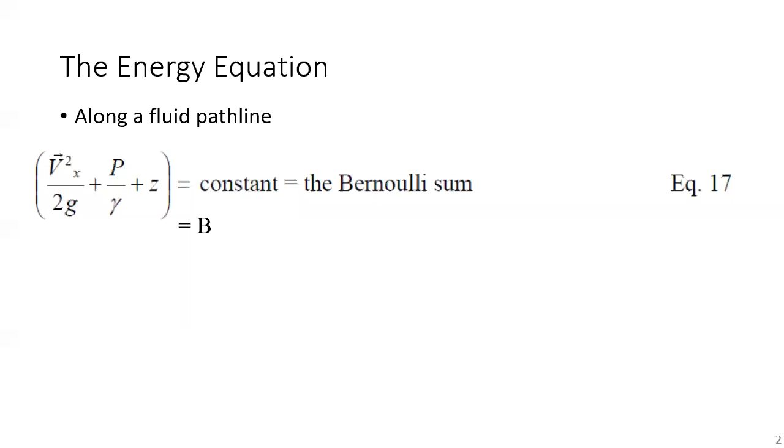And then we talked about the fact that those 3 terms sum to what we call the energy grade line. And so if you can draw the path line, and along the path line you can calculate the Bernoulli sum B anywhere, you can plot out B everywhere for that path line, and that's known as the energy grade line. Right now in systems without energy losses, no viscosity, and without mechanical energy, that energy grade line is just a horizontal line, or if you're talking about a system, it's a horizontal surface over the system.

In the future, that will not be true. Once we get energy losses, once we have mechanical energy, then the energy grade line can move around. And the hydraulic grade line is the sum of the potential energy, and that would be P over gamma plus Z. So for example, if we just looked at the center line of the pipe and called that our elevation, the distance between that center line of the pipe and the hydraulic grade line is just P over gamma. HGL is P over gamma plus Z.

And any one of those values could be zero. All three of those values could be zero. The energy grade line could be a positive number, could be a negative number, but it's a real number.

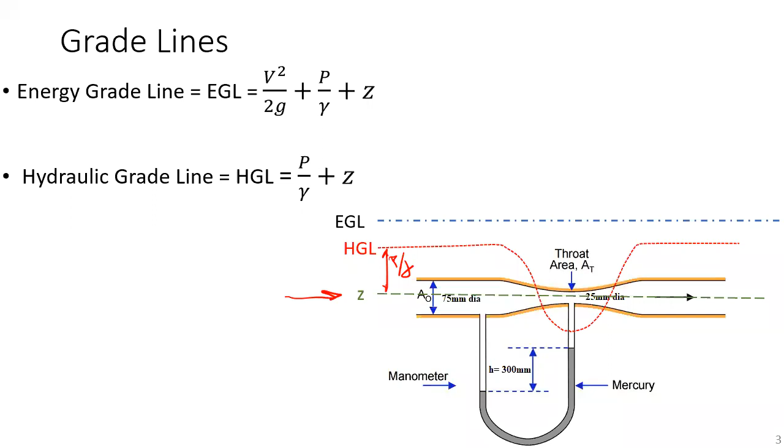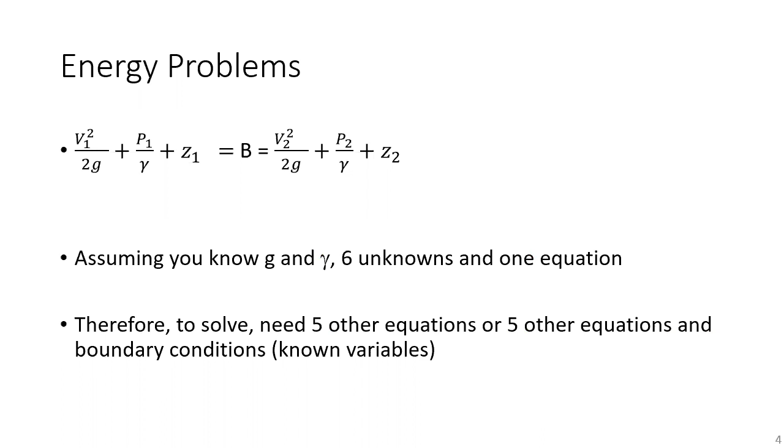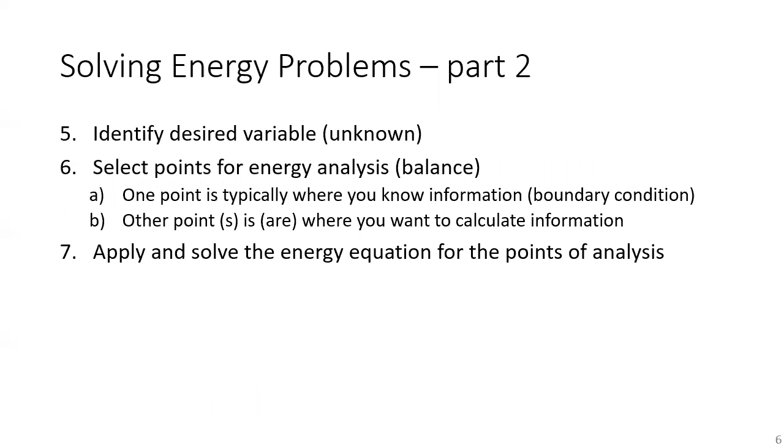So typically when we're looking along the path line, what we'll do is set the total energy at one place equal to the total energy at another place. B1 is equal to B2. And what we did last time was I reviewed how we solved the problems. I gave you all this information before. The last two lectures we had these.

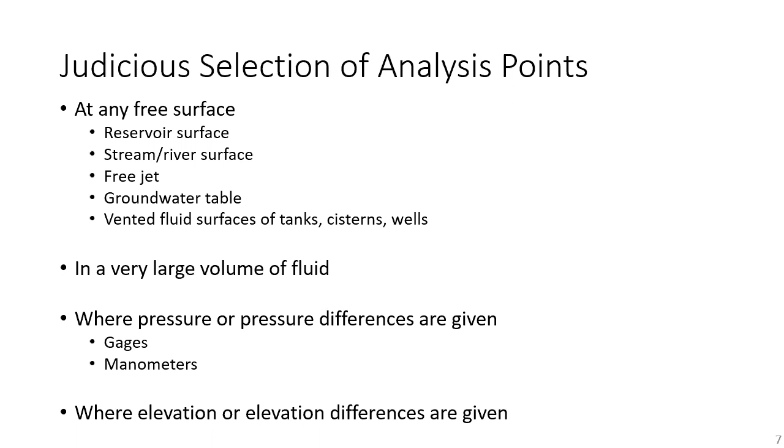We talked about where we select points. Normally you select points where you either want to know something or where you already know something, because that helps you determine some of the variables in that equation. And then last time what we did was just apply this without any numbers first to a very simple problem, the leakage from a tank.

And in this case, what we said was we selected point 1 at the free surface because we know a lot of information there. We also, following the guidance I gave to you, set our elevation datum right at the center line of the jet. And so what that allows us to do was cancel out a lot of terms. And we basically had that the total energy on one side is just H, and the total energy on the other side was the velocity head of the free jet. Pretty simple. And again, that happened because of where we took those 2 points.

And so again, we started off with the equation I just had up there, and we came up with the Torricelli equation. And if we were after the discharge, that would just be that velocity we found times the area of the orifice. This seems like a pretty underwhelming answer, but this equation, it's either called the Torricelli equation or more commonly the orifice equation, because flow is issuing out of an orifice. It's used for so many actual real problems.

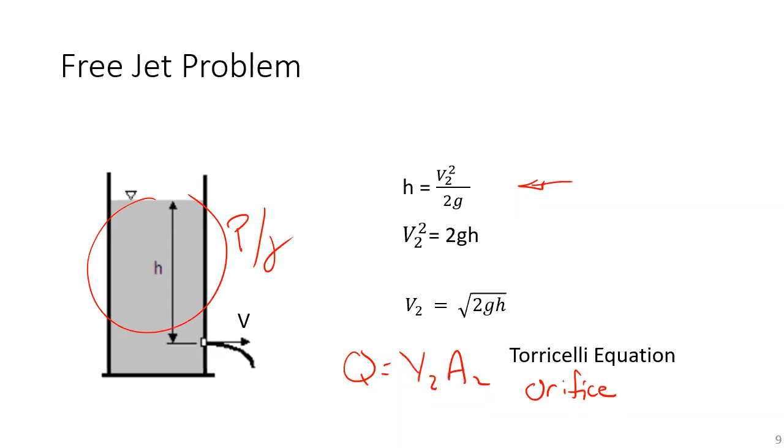Last time I talked about leakage from pipes, but I also talked about how you actually use water. We store the water basically as potential energy, either H or P over gamma. And at the very end, where you turn the valve, we convert it all to V squared over 2g. So this is actually a fairly important equation when we're talking about moving fluids around, especially in pressurized systems. So I wanted to do an example today. And to help everybody keep up with me, I didn't prepare any slides for it.

So the system is going to look like this. We're going to have a pipe, and it's going to expand. So it looks something like this. And flow is moving upwards and to the right through this pipe. And what we would have is a diameter down here of 15 inches. And the diameter up above is 24 inches. So let's call that D1 and D2. And so obviously this is an expansion. And we're going to have a pressure gauge in the smaller diameter pipe down here, and that pressure gauge is giving us a reading of 60 pounds per square inch.

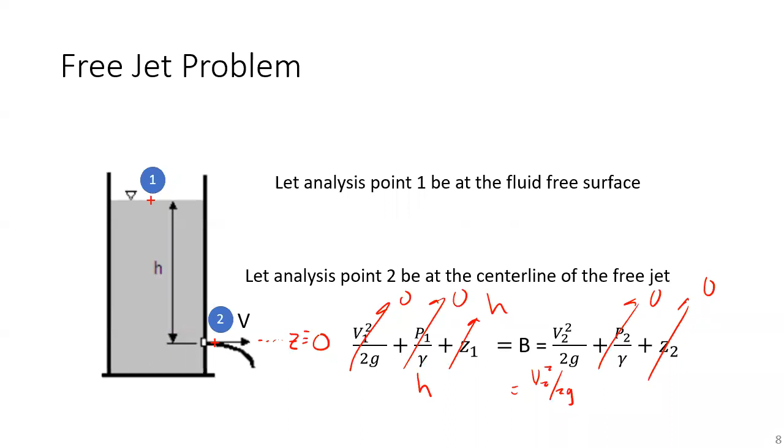And we know in this case, the center line elevation of the pipe is 108 feet above mean sea level. So when you see something like that, feet mean sea level, it means you're referencing it to a national geodetic vertical datum. In the last problem we had with the Torricelli, what we did was just arbitrarily set a local elevation datum. Just like on the surface, we have a local pressure datum, and that's atmospheric pressure, and that's 0. So with these linear scales, whether it be elevation or pressure, the important thing is typically the difference from one location to another, not necessarily the absolute value.

And in this problem, where I show the pressure gauge, for your homework problems, or heaven forbid on an exam, that could be a manometer. And the manometer is telling you nothing different than what a pressure gauge is. It's telling you pressure at that location. So in this case, we're going to have a known discharge, and our discharge is going to be 14 cubic feet per second.

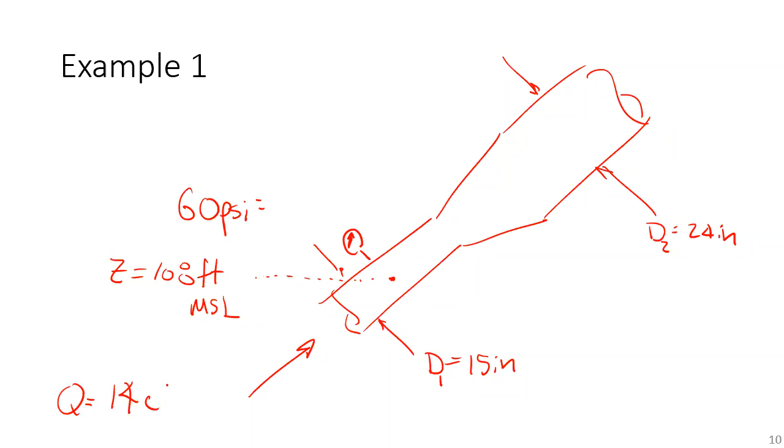And the fluid in this case is oil, and the specific gravity of oil is 0.83. And you know that the specific weight of oil would be the specific gravity of oil times the specific weight of water. So we'll be using that later. So given all of this information, at this location, we're going to say we have an elevation of 128 feet.

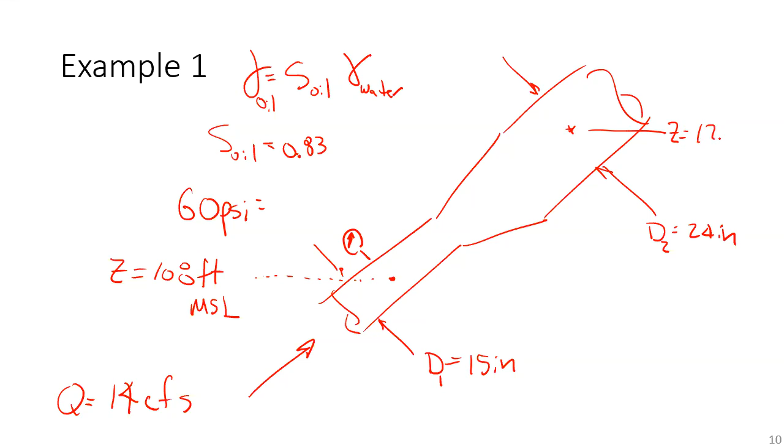Also with reference to the same datum, mean sea level. And for all this information, what we would like to do is compute the pressure at the second location. So we're going to call this first location point 1 and the second location point 2. Why did we pick point 1 where it is? Because we know information there.

We know the elevation, we know the pressure, and we know the diameter of the pipe there, and we know the discharge, so we know the velocity. At point 2, we picked that point because that's where we want to know information. We want to know the pressure there. Fortunately, we also know the elevation there, and because we know the discharge and the diameter, we know the velocity there.

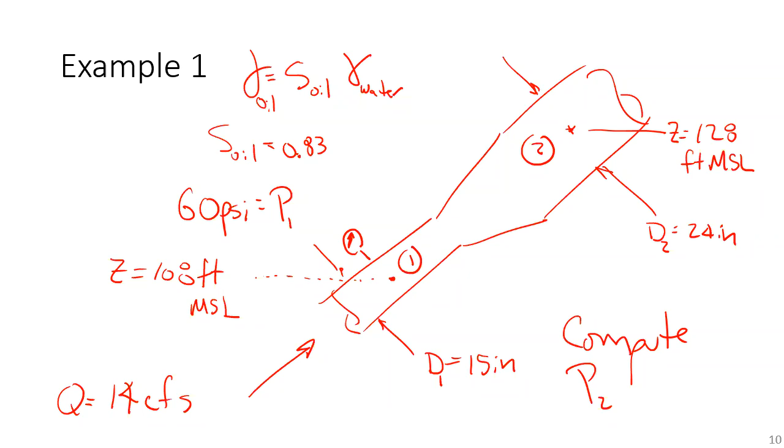So I'll give you a few seconds to catch up, and then we're just going to go into the next slide and start to calculate everything. So obviously, if we're looking at this system, what we're saying is, when you start mumbling this in your sleep, you'll know you have understood it and completely put it into long-term memory. Right? So you're saying the total energy of 1 is equal to the total energy of 2.

And I'm going to just draw while you're writing that. Here is our system. And basically, the energy grade line is a horizontal line above this system. And we know we have V1 squared over 2g, and we're going to have at location 2, V2 squared over 2g, which I'm showing is a smaller distance because you have a larger diameter going to 2. Larger diameter, lower velocity. That's what continuity would say.

And if this is Z1, then the distance, when you subtract V squared over 2g from the EGL, this is the HGL. And so through the transition, the HGL is actually increasing. And the difference from the HGL to the elevation is the pressure. And so we have point 2. And again, the distance between the elevation and the hydraulic grade line is pressure P2 over gamma.

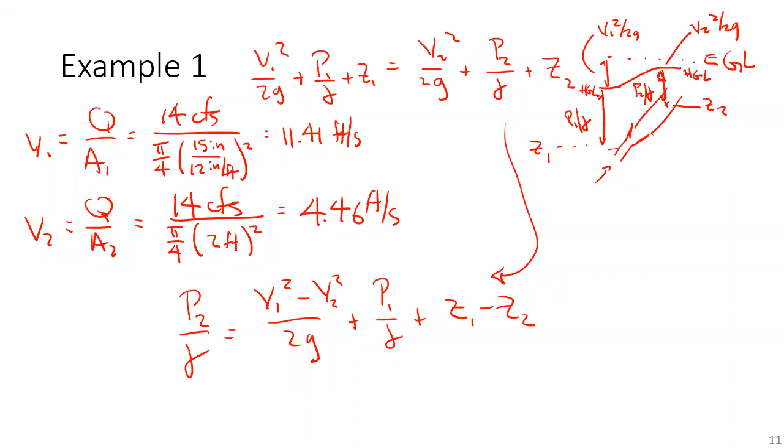Okay, so that's divided by 2 times the acceleration due to gravity, 32.2 foot per second squared, plus P1 over gamma. P1 is 60 pounds per square inch, PSI. Everything in the equation we want in BGS, foot, seconds, and pounds. So we'll multiply this by 144 inches squared per foot squared. And that would be the pressure in pounds per square foot.

We're dividing by the specific weight of oil, of course. And so that's the specific gravity of oil, 0.83, times the specific weight of water. Temperature was not specified. So again, my guidance to you is assume room temperature while you're in this course. When you leave here, you would have to use the temperature of whatever system you're trying to model. If it's a pipe in the ground, it might be the average ground temperature at that location.

If it was for some type of a process in a building, it could be a really hot temperature or cold temperature. That's part of your design. So from the back of your book, at room temperature, the specific weight of water is 62.4 pounds per cubic foot. And then the last two terms, Z1 was 108, and I'm just going to say feet. It is feet mean sea level, MSL. And then Z2 was 128 feet. And that's also mean sea level.

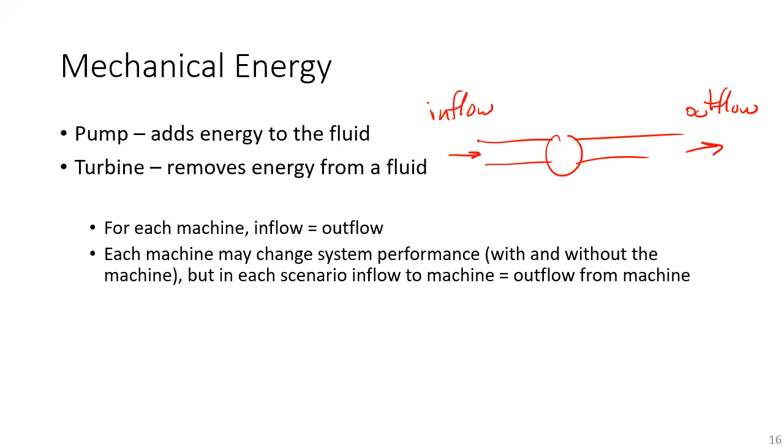So for each machine, always remember this. Let's say here's a pipe, and we have either a pump or a turbine in it. I stressed this last time. In that setting, inflow is always equal to outflow. Always. When you install a machine or turn a machine on and off, the entire system performance may change, and I'll explain that a little bit. However, in the new scenario with the machine, the inflow to the machine is always equal to the outflow from the machine. So I think I have a blank slide next. I do not, so let's do it here.

Have you ever seen this system before? Big reservoir, hole in the side, water issuing out of it. Yes, we did this last lecture. I reminded you of it at the beginning of this lecture, and if you recall, that gave us the Torricelli equation.

Right? So there is how we would calculate this. And H, again, is the distance from the free surface down to the center line of the free jet. So let's say,

same system, only we're going to put a pump here. Normally you do the opposite, you put a turbine there and take out energy, but I just want to show you what happens. So here's the end of the pipe here, and you have a free jet flowing. So again, backing up to the system up above.

What a pump does is it takes the energy grade line incoming and it kicks it up some distance, EP. That's the energy that the pump is putting into the fluid. And so the energy after the pump is higher than the energy before the pump. B1 plus EP is equal to B2.

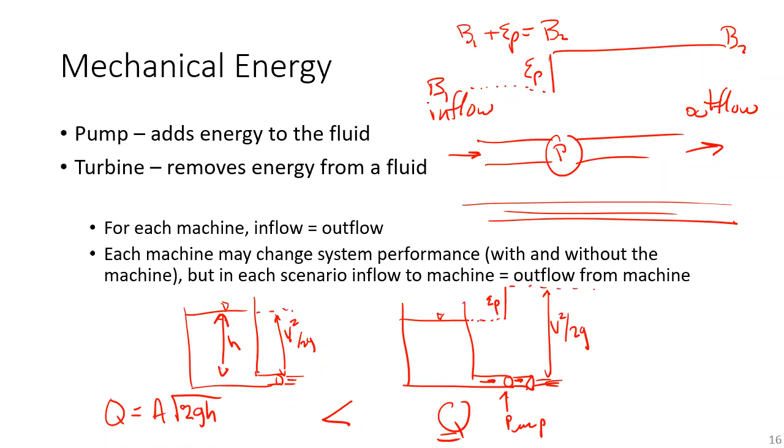But again, the flow going into the pump and out of the pump is the same. It's the discharge of the new scenario, okay? So I've kind of beat this over the head with a stick, and there will still be a number of you who will tell me that on your homework problems, you've got a different flow going into the pump than coming out of the pump. And as I said, if you find a machine like that, please bring it to me.

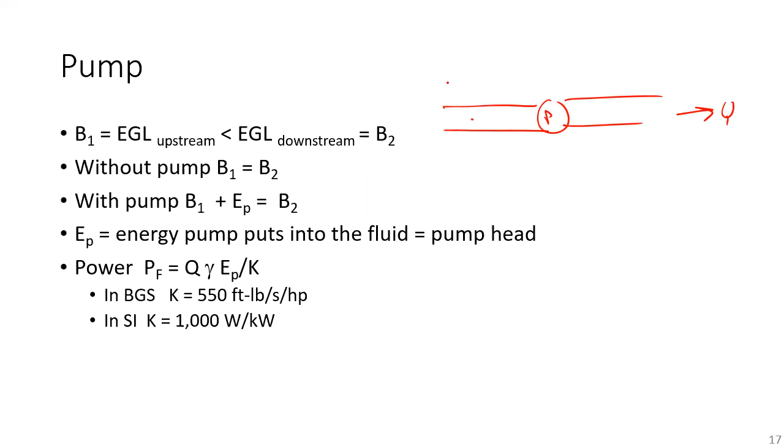So for a pump, what we say is that the total energy upstream, oops, how'd that happen? So if the flow is this way, here's the pump. If we have some point upstream, we'll call 1, the total energy upstream is less than the total energy downstream. So again, looking at the pump from the pump point of reference, point 1 is upstream, point 2 is downstream.

And again, the energy grade line might do something like this. And remember, the energy grade line can be below the pipe. If you've ever seen a pump, so here's a lake or a cistern, and here's a pump up here, and here's your intake pipe. And then you're going to pump the water, say, to irrigate fields or an orchard or whatever. Here, the energy grade line before the pump is physically below the intake pipe to the pump. So the energy grade line can be anywhere in the system.

The only critical thing about when you have the energy grade line, and particularly the hydraulic grade line below the pipe, is making sure that you don't cross that vapor pressure line and start boiling the fluid at ambient temperatures because you lowered the pressure so much. And that's particularly a problem on the intake side of a pump. That's where you can get cavitation because you may have designed the system perfectly, or you're looking at a pumping installation and it's having cavitation problems.

You look at the original design and the design was fine, but in the 40 years since they built the system, the pipe corroded. It's got more frictional resistance. And so as the flow goes through it, it just doesn't have as much energy by the time the fluid gets right to the pump. So there are a lot of reasons for this, and it's not always intentional that you design a system to fail, but it could certainly happen over time.

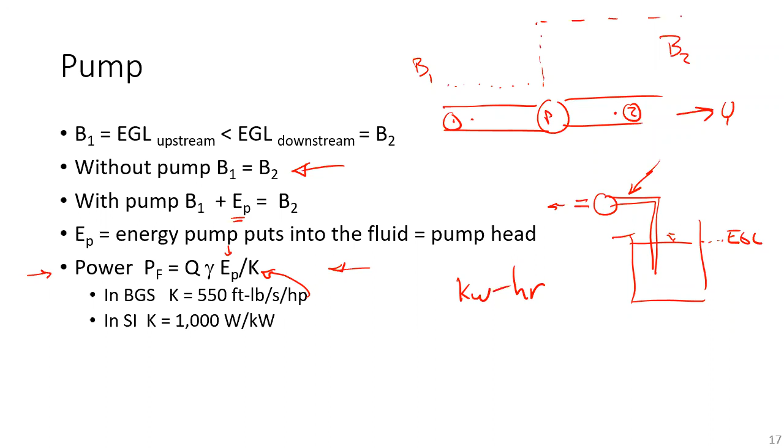And just like water demand over time has a diurnal curve, electric use does too. In the domestic sense, say in your house. At a water treatment plant, you want that to be almost constant. You want almost everything in the water and the wastewater treatment plant to be constant because you don't want to have to vary a lot of things. Chemistry is pretty important, and chemistry changes when things vary. And so we produce or treat things on an almost uniform basis, even though the demand can be incredibly variable.

So this power is known as the fluid power. When we just take this equation, again, we're just talking about pumps now. EP is the energy the pump puts into the fluid, Q is what's flowing through the pump, and the specific weight of the fluid moving through the pump is gamma. When we just take those fluid flow variables and develop the power from it, this is known as the fluid power. That's actually what's happening in the fluid.

As you can imagine, we need energy to drive the pump. That energy could be a coal-fired or wood-fired steam engine. It could be pulleys. Typically, it's just electricity. And what you can obviously imagine is that the energy we put into the pump is more than the energy we can put into the fluid due to either electrical or mechanical inefficiency of the pump itself or the impeller design, which we'll talk about much later in this course when we talk about momentum. So the fluid power is not the same as the input power to the pump.

If we look at that ratio, the power that's actually put into the fluid versus the power we put into the pump, that's known as the pump efficiency. That little n is the Greek letter eta. So eta P is the pump efficiency. And in the colloquial sense for water or wastewater, we call that the wire to water efficiency. What it's trying to convey is all of the inefficiencies from the electric current that goes into the motor that's spinning the pump all the way to where the energy is put into the fluid itself.

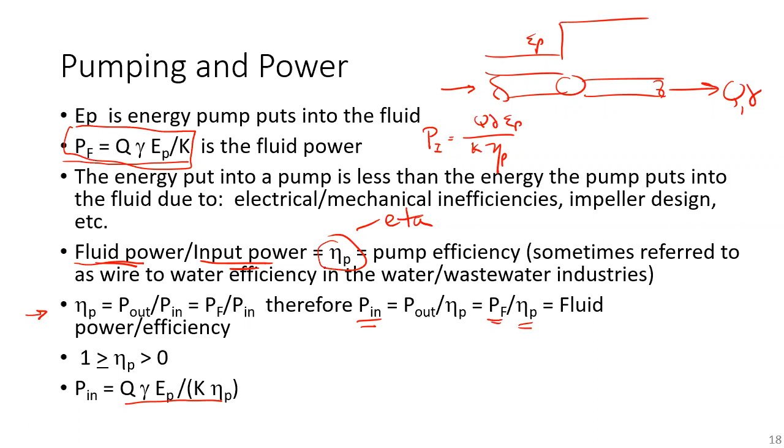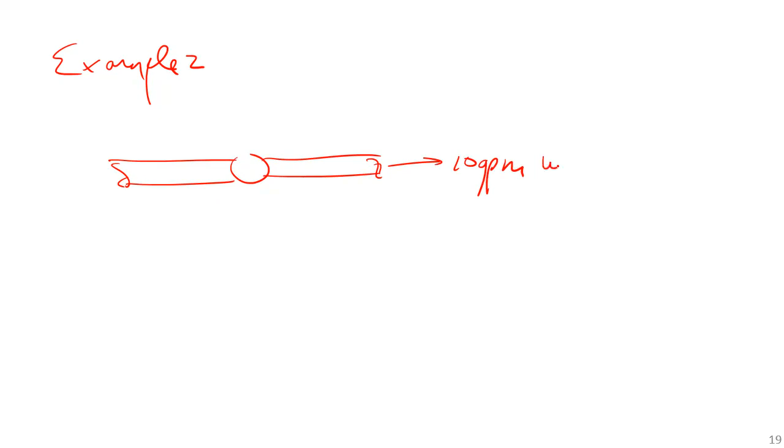So what we're going to have is something we've been drawing a lot of today. We're going to have 10 gallons per minute, in this case of water flowing. We're going to have a pipe, and the pipe diameter is 4 inches before and after the pump. We're going to have a gauge before the pump, and it's really common to have gauges on both sides of a pump. In this case, we only have one. And the gauge before the pump is saying that we have 10 pounds per square inch.

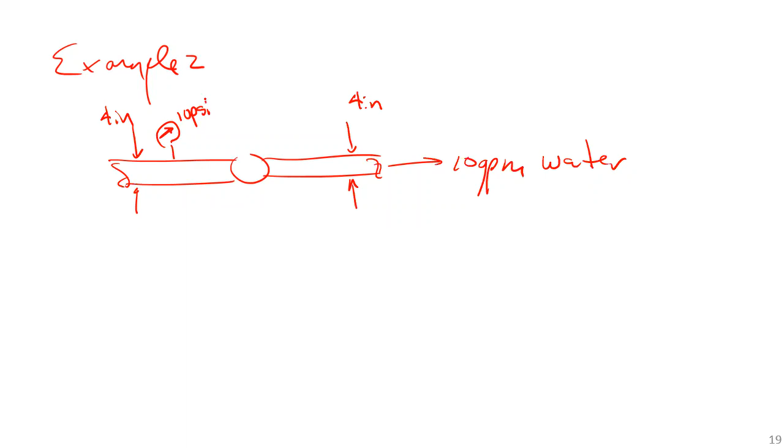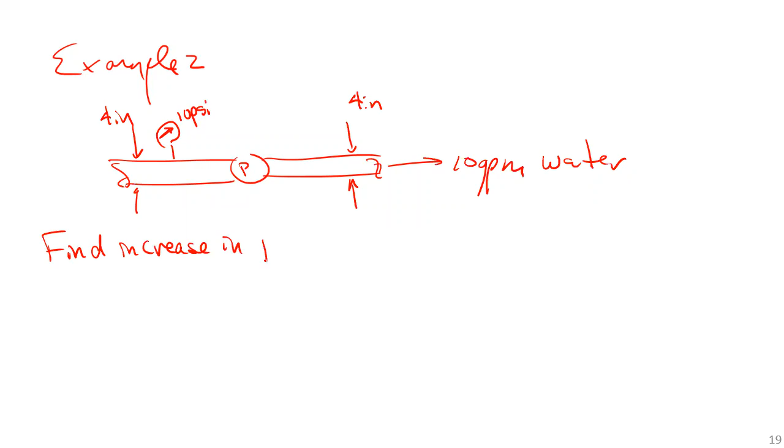And there's two pieces to this problem. The first one is, what is the increase in pressure when the pump puts 0.5 horsepower into the fluid?

Okay, so basically, we're going to call point 1 where we have that gauge because we know information there. We not only know the pressure, but because we know the diameter and the discharge, we know the velocity. And downstream, we're just going to call point 2 somewhere downstream of the pump, very close to it, because we want to know the pressure there. Specifically, we want to know the pressure difference. So point 1 to point 2, we want to know P2 minus P1. That's what it's really asking. And we can find P2 once we know the pressure difference.

So the second thing we're going to ask in this question is, what's the input power to the pump, P in or PI, if the pump is 87% efficient? Very, very commonly for the types of pumps we use in civil engineering applications, typically for water or wastewater, pump efficiency is 85 to 95%. It's very high because, again, it's a very mature field.

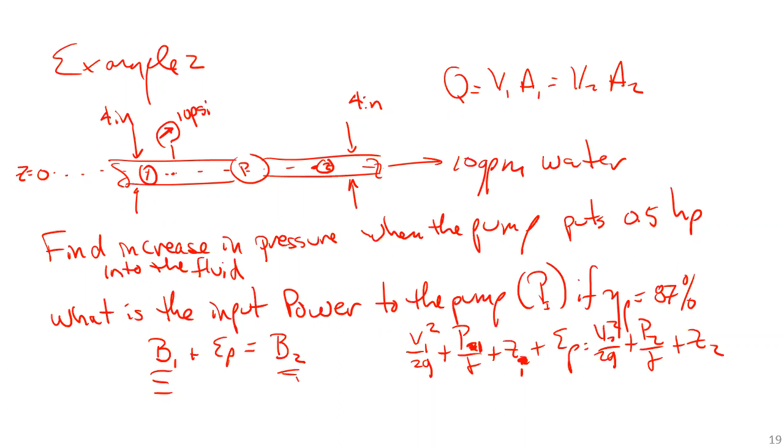All right, so again, I said I would write this again, and this time I'll write it correctly. So now what we have to do is start to knock things out or identify what you know. We already said that that's true. That's continuity. Can you tell me a story about A1 and A2? They're the same. So what does that say about V1 and V2? So can we just say the first law of calculus, when in doubt, cancel out? Sure. So we'll get rid of those 2 terms. That makes life a little easy.

And now what we also know is that Z1 is equal to Z2 is equal to 0 because we intentionally put Z right at the center line. Could we have put Z 10 meters below or 20 feet above? Absolutely. But Z1 and Z2 are still the same. So what this leaves us with is P1 over gamma plus EP is equal to P2 over gamma. And obviously we're after P2 minus P1, so we can solve this equation for P2 minus P1.

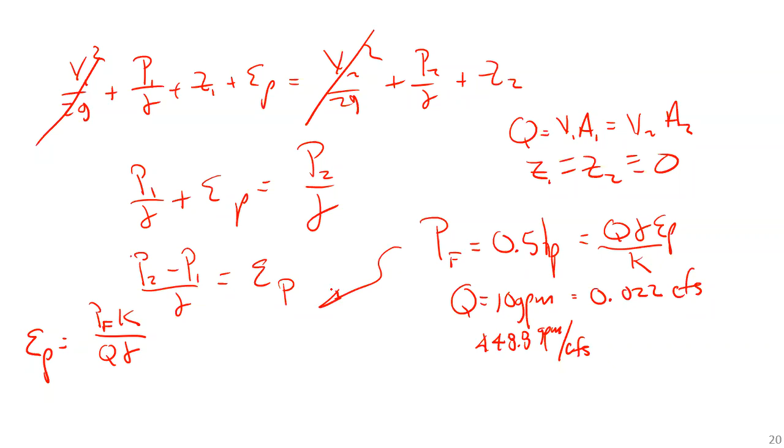So the fluid power is 0.5 horsepower. The conversion factor is 550 foot-pounds per second per horsepower. So that gives us foot-pounds per second in the numerator. And then in the denominator, we have the discharge of 0.022 cubic foot per second, and the specific weight of water is 62.4 pound per cubic foot. And that gives us a pump energy or pump head of 198 feet.

So we're putting a half horsepower into the fluid. That sounds like a number people might typically use as a frame of reference. But really, the same way of saying that is we're putting 198 feet of energy into the fluid. That starts to become abstract. So now that we know that, what we're going to do is put that into the equation that we just generated. I'm going to write that on the next page.

So again, what we had was P2 minus P1 over gamma is equal to EP. And we just calculated that EP is 198 feet. So in this case, P2 minus P1 is equal to gamma EP, which is 62.4 pound per cubic foot times 198. And that will give us an answer in pounds per square foot, 12,340 PSF. And if we divide that by 144 inches squared per foot squared, that's 85.7 PSI.

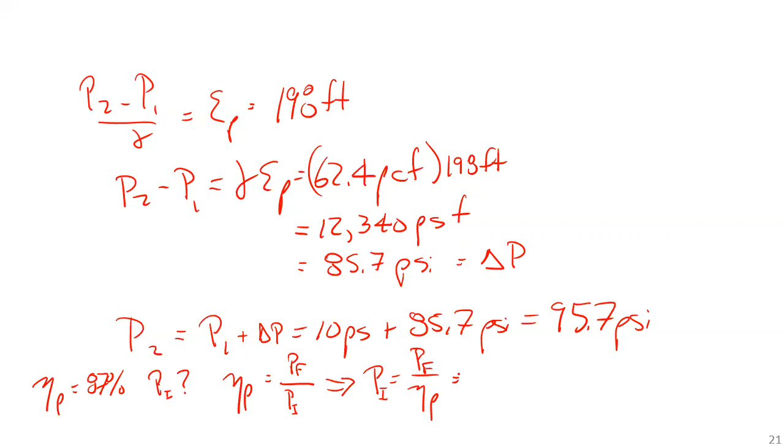And the problem statement said that we're putting 0.5 horsepower into the fluid. The efficiency is 87% or 0.87. So what we're putting into the pump is 0.57 horsepower. And what the pump delivers to the fluid is 0.5 horsepower.